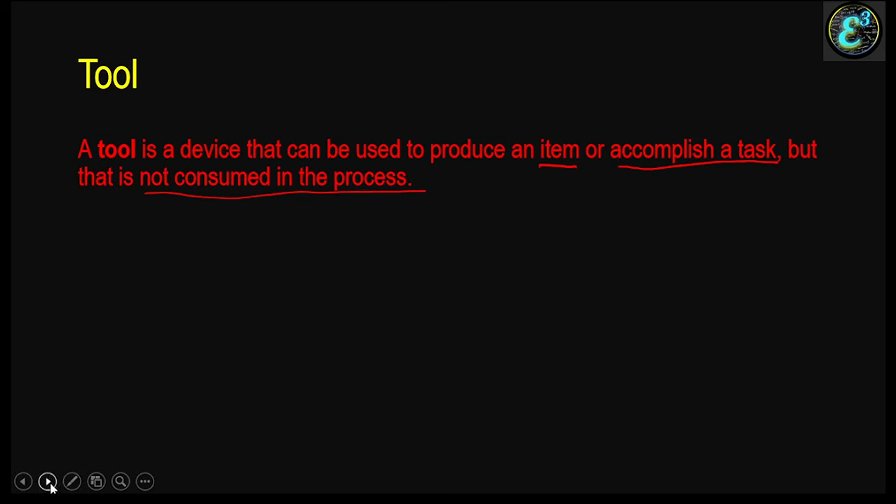Then we have types of electrical tools. So may apat po tayong type ng electrical tools. We have hand tools, tools manipulated by hands without using electrical energy. Example, puller, hacksaw, pull-push rule, pliers, hammer, and others. Meron naman tayo pong machine tools. These are tools manipulated by our hands, but they also utilize electrical energy in order to operate and to make the work easier.

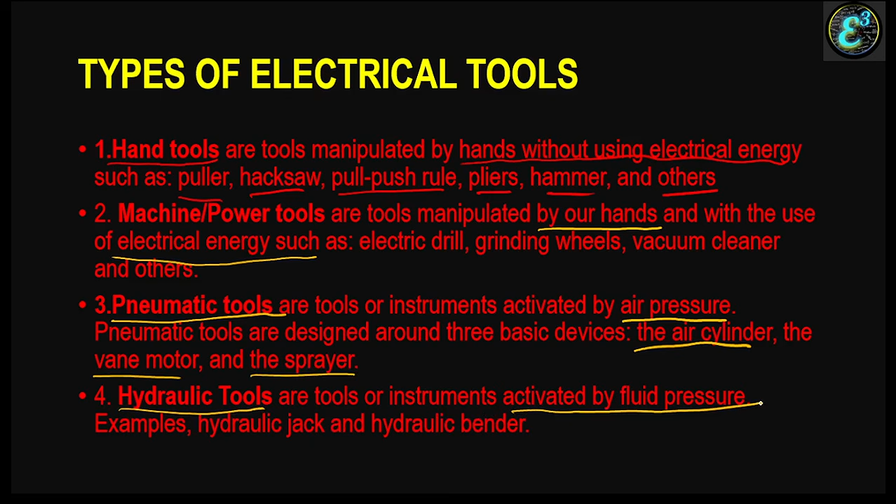Then you have also pneumatic tools. These are instruments activated by air pressure. The parts po ng pneumatic tools, we have the air cylinder, the vane motor, and the sprayer. Hydraulic tools naman, tools that are activated by fluid pressure. Example is a hydraulic jack and the hydraulic bender.

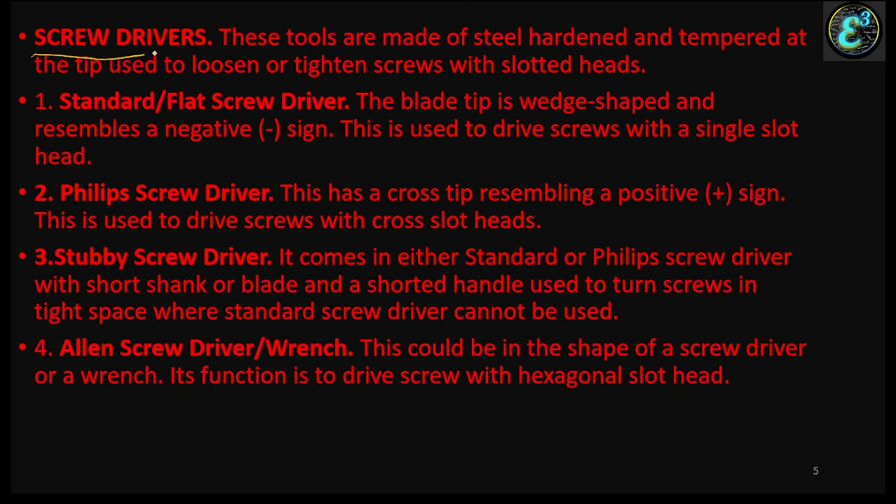Then common electrical tools. Unahin natin yung pinaka-common talaga, yung screwdrivers. These are tools made up of hardened and tempered steel, yung pinatigas po yung tip, usually used to loosen or tighten screws. We have four po na common sa electrical works. We have the standard or the flat screwdriver. Ang kanyang tip po is wedge shape and resembles a negative sign. It is used to drive screws with single slots. Then we have also Phillips screwdriver. Cross po kanyang tip, which resembles a positive sign, and used to drive screws with cross slot heads.

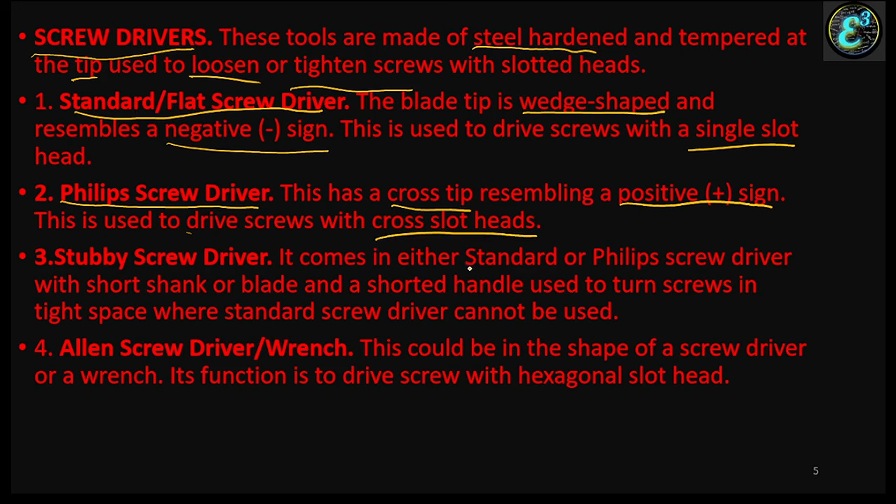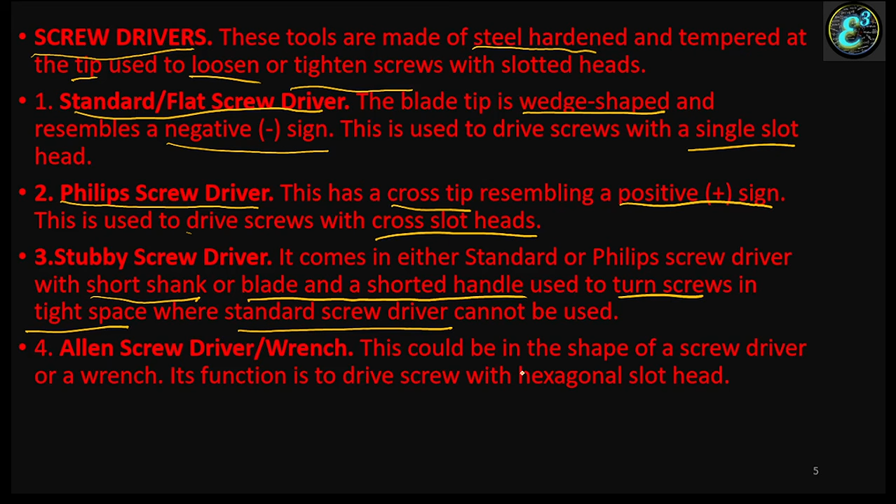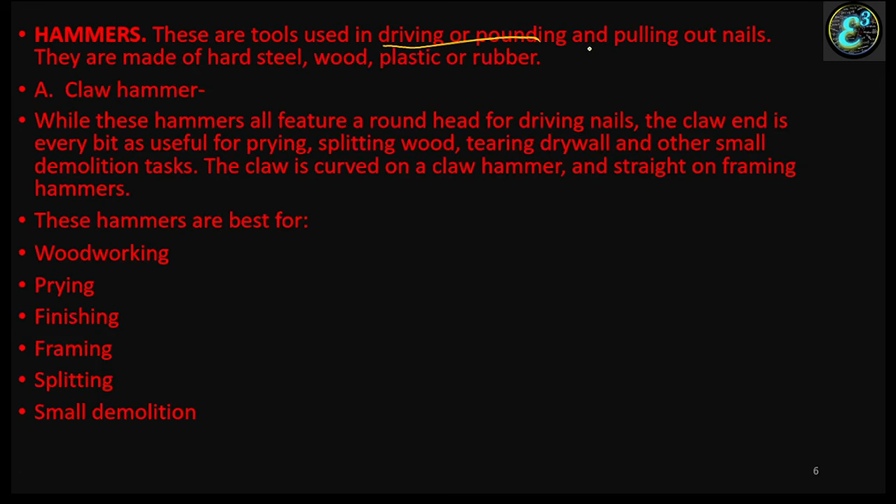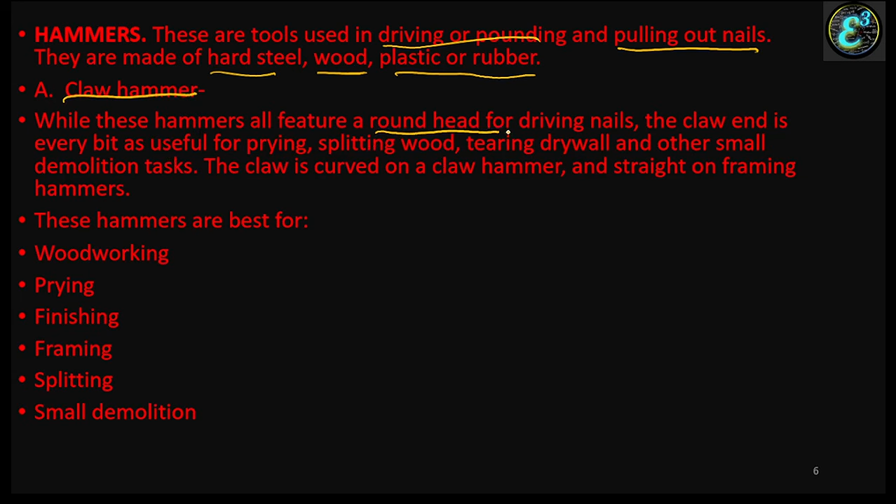Then we have hammers. Hammers are tools used for driving and pulling out nails, and they could be made with hard steel, wood, plastic, or rubber. The very common of that will be the claw hammer. It has a round head for driving nails and the claw end for prying, splitting wood, tearing drywall, or other demolition tasks, and also for pulling out nails. The claw is curved, and straight on the framing hammers. The purpose of this hammer: woodworking, prying, finishing, framing, splitting, and small demolition.

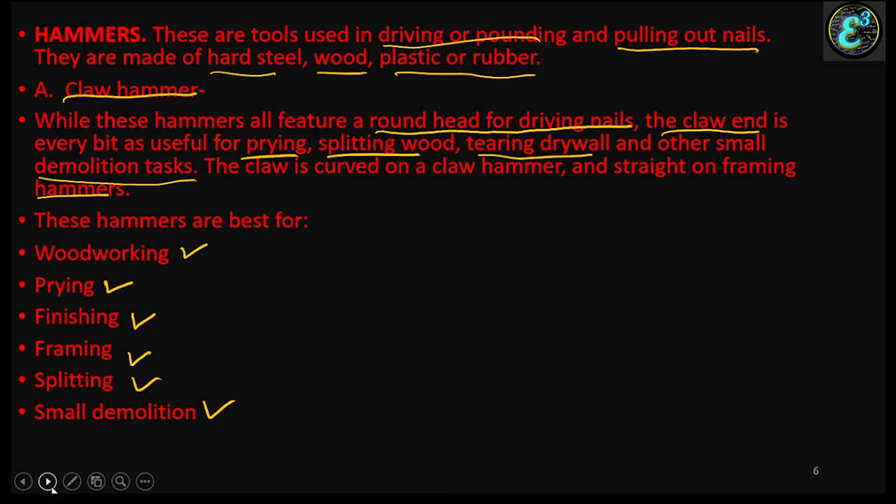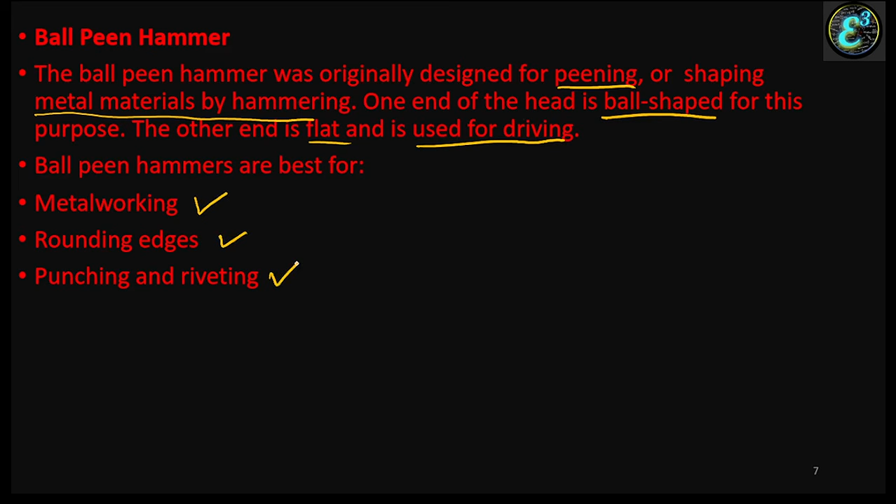Then we have ball peen hammer, which is designed for peening or shaping material by hammering. One of the ends is ball in shape, yun po ang kanyang purpose. Tapos the other end is flat and is commonly used for driving. This type of hammer is commonly used for metalworking, rounding edges, punching, and riveting works.

Then we have dead blow hammer. They are designed to strike surfaces with great force. The dead blow means they won't rebound. Ito po yung hammer na kapag may pinound kayo, hindi po siya magbabounce. These are usually used for automotive application, setting joints, and installing floorboards, in which ang extra vibration po is not advisable sa mga ganito na mga works.

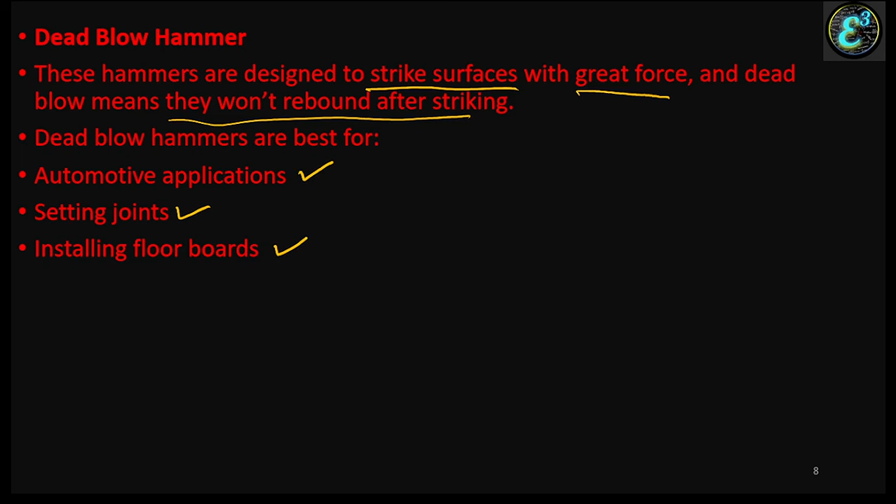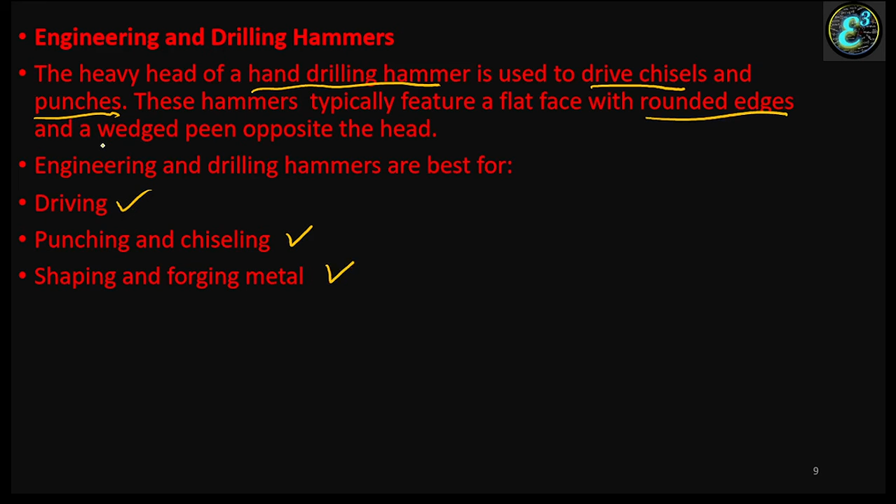Engineering and drilling hammers. The heavy head of a hand drilling hammer is used to drive chisels and punches. Ito po yung ginagamit kapag tayo po ay gagawa ng roughing in works, layouting po sa ating concrete, especially in cases na hindi po natin nalagyan ng tubo. They are used for driving, punching, chiseling, shaping, and forging metal. Rounded po ang kanyang edges, tapos sa kabila naman po is wedged peen.

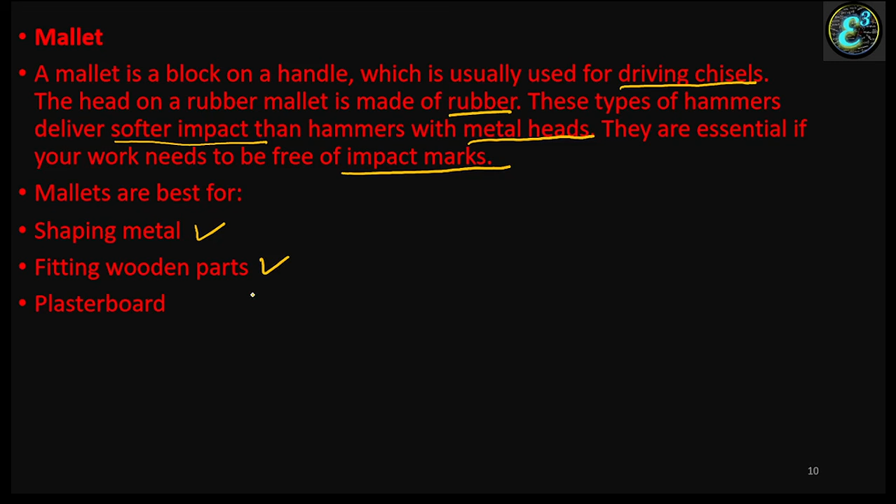Then mallet. A mallet is a block on a handle, usually used for driving chisels. The head on a rubber mallet is made of rubber. These types of hammer are used for softer impact than metal heads. This is usually used if yung trabaho nyo ay dapat walang impact marks. It is used for shaping metal, fitting wooden parts, or working with plasterboards.

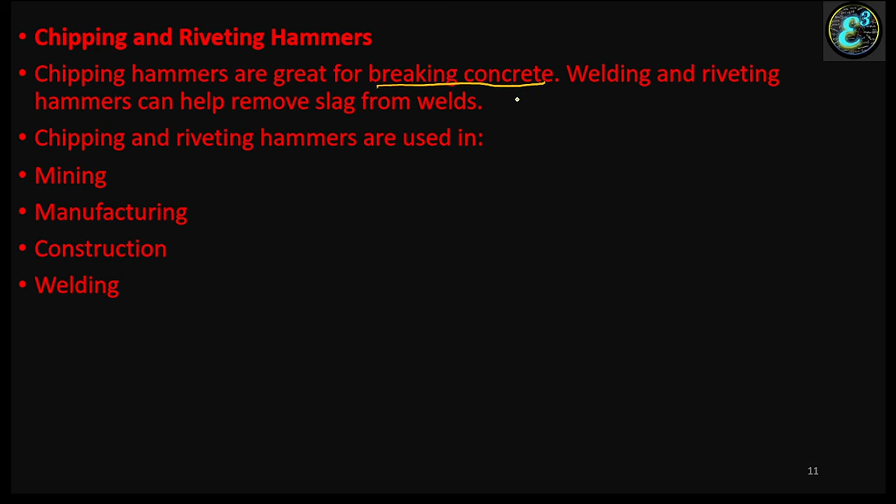Then you have chipping and riveting hammer. Usually used for breaking concrete, yung chipping hammer natin, and also for welding and riveting works, help in removing slag from welds. They're usually used in mining, manufacturing, construction, and welding. Okay.

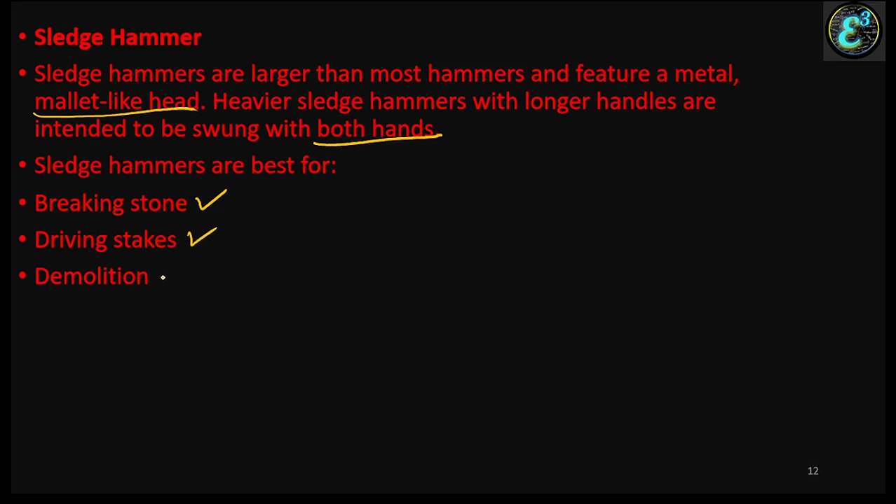Then we have sledgehammer. So ito yung isa sa pinaka-common hammer. Ang kanyang head is mallet-like. They are usually swung using both hands. Dalawang kamay po yung gagamitin using this hammer. They're usually used for breaking stone or for driving stakes, yung mga poste na kahoy or metal, and demolition jobs.

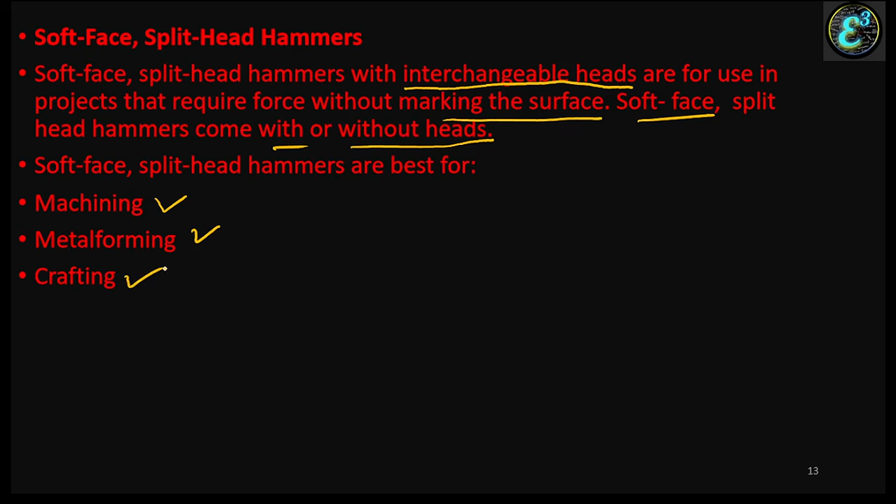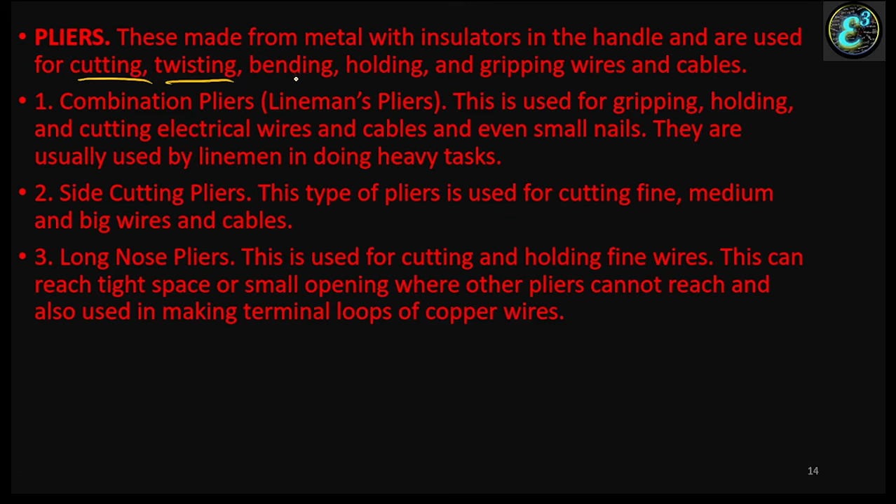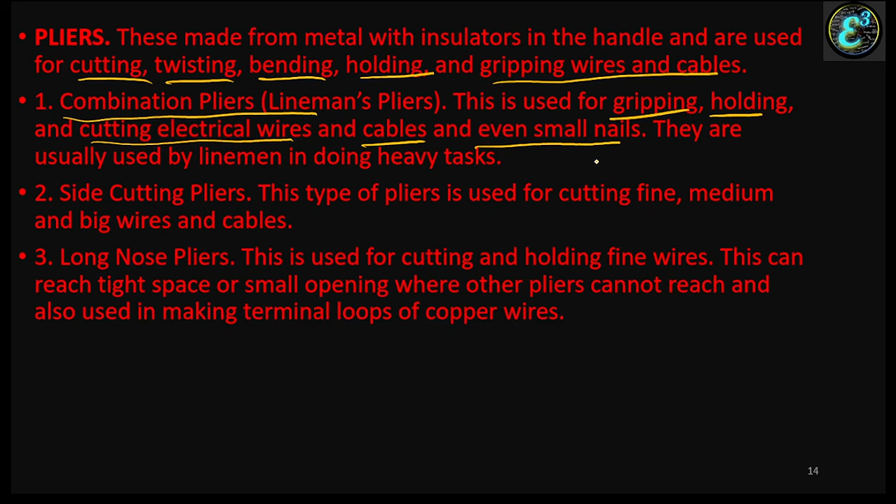Then pliers. So we are done with hammers, punta po tayo sa pliers. We have 3 common pliers that we are going to use, and pliers are used for cutting, twisting, bending, holding, and gripping wires and cables. Yung una po is combination pliers, also known as lineman's pliers, used for gripping, holding, cutting electrical wires, cables, and even small nails. They are used by linemen in doing heavy tasks.

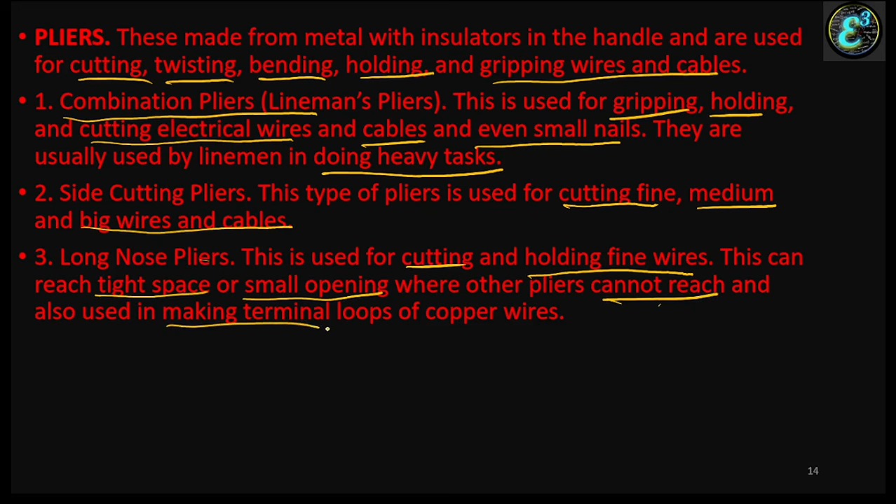Yung side cutting pliers naman, they are used for cutting fine, medium, and big wires and cables. Yung long nose pliers naman, they are used for cutting and holding fine wires, and they are especially used to reach tight spaces or small openings where other pliers cannot reach, and used in making terminal loops of copper wires.

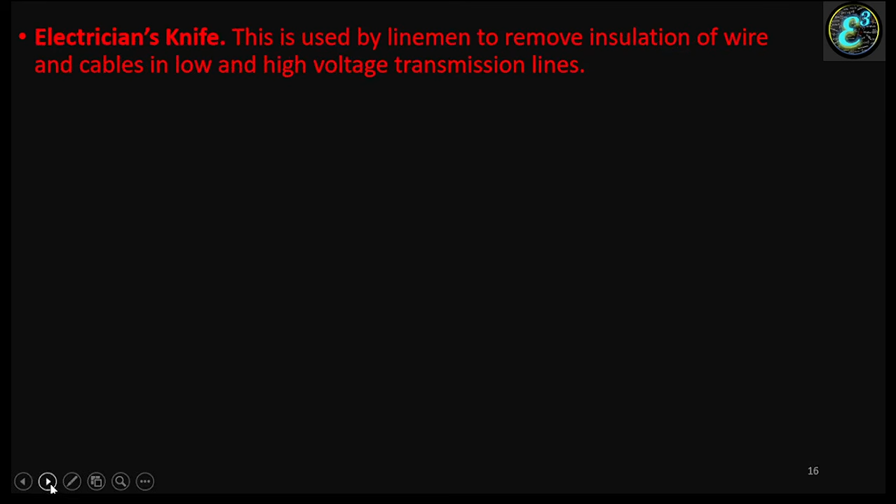Then you have the wire stripper. The usual use for this one is to remove the insulation of medium-sized wire, number 10 to number 16 AWG. Yun po ang kanyang usual na size na kaya niyang mag-remove ng insulation. Electrician's knife. This is commonly used by linemen to remove insulation of wire and cables in low and high voltage transmission lines.

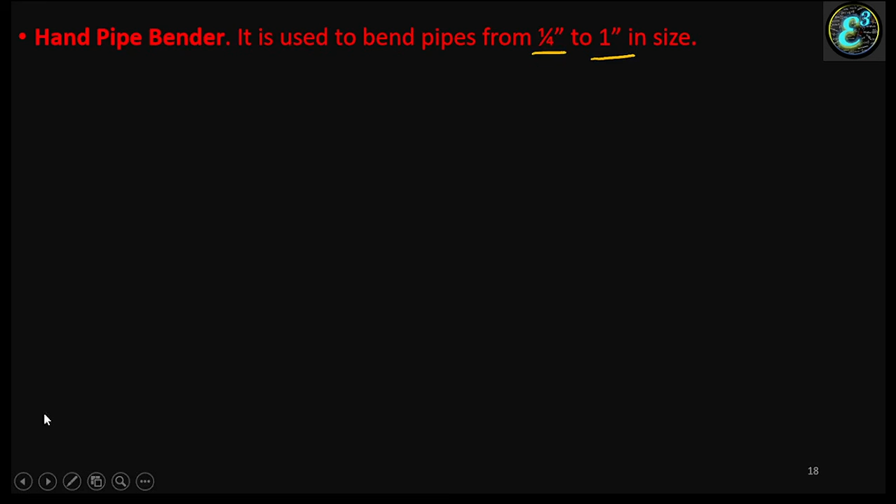Hacksaw. This tool is used to cut metal conduit and armored cable. Then hand pipe bender, used to bend pipes by hand from 1/4 inch to 1 inch in size. Kapag lumampas po ng 1 inch, usually we are going to use a hydraulic bender.

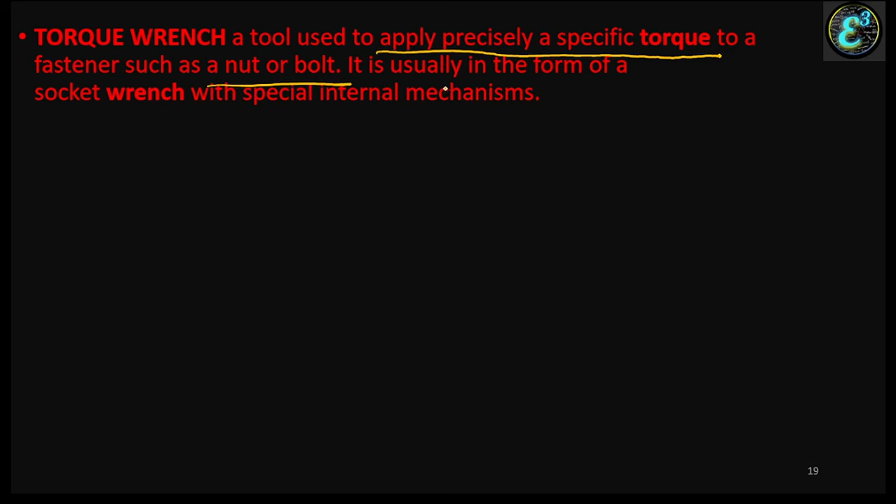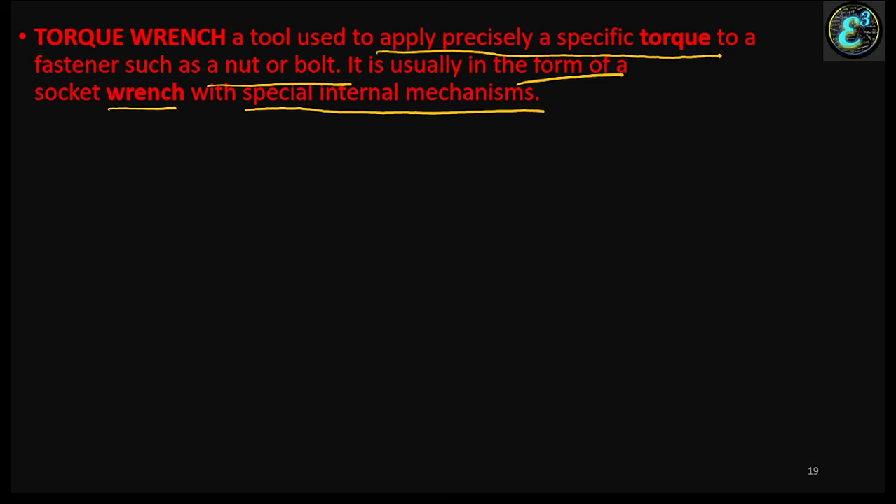Torque wrench is a tool used to apply precisely a specific torque to a fastener such as a nut or a bolt. It is usually in the form of a socket wrench with special internal mechanisms kung saan magse-set po tayo ng torque; if the required torque is achieved habang hinihigpitan natin yung bolt, it will not continue. This is done para hindi po malagyan ng sobrang torque yung ating bolt, to prevent it from breaking due to excessive torque.

Knockout punch, also known as chassis punch or panel punch, Greenlee punch, or Q-Max, is a hand tool used to punch holes through a sheet of metal, which is usually used kung magdadagdag po tayo ng butas sa ating mga boxes and panel boards.

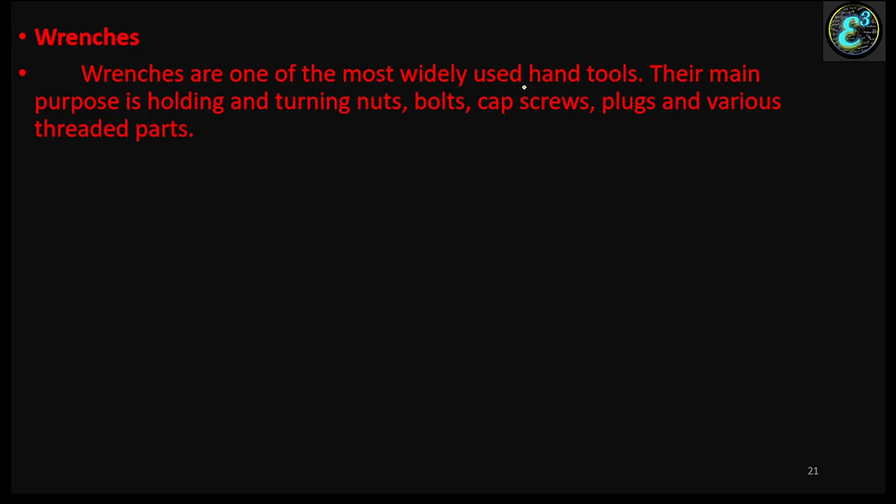Wrenches. Wrenches are one of the most widely used hand tools. Their main purpose is holding and turning nuts, bolts, cap screws, plugs, and various threaded parts. We have here the different types of wrenches. We have the open end, widely used, made with openings at a 15 degree angle, which permits rotation of hex nuts with a 30 degree swing.

Then the box wrench naman, they are made in long and short patterns with double offset, which is 15 degrees angle ang offset. 12-point hex and square openings are available. Yun po ang mga klase ng bolt na kaya nilang i-tighten or i-loosen. Then combination box and open wrench. Yung isang dulo niya is open, yung isa naman is box.

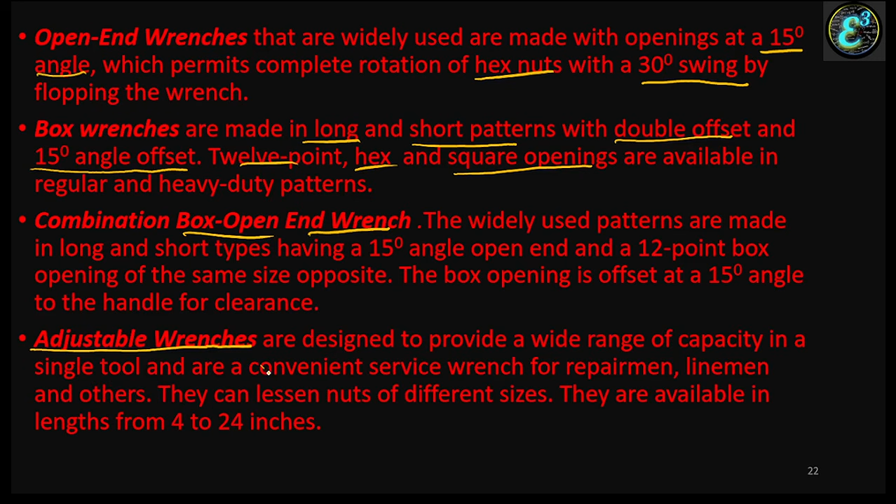Then adjustable wrench. This is a type of wrench na kung saan you just set it; if maliit yung bolt, you set it for that size of bolt, no need na maghanap pa ng box or open end wrench para doon sa bolt na yon. Their size is available from 4 to 24 inches.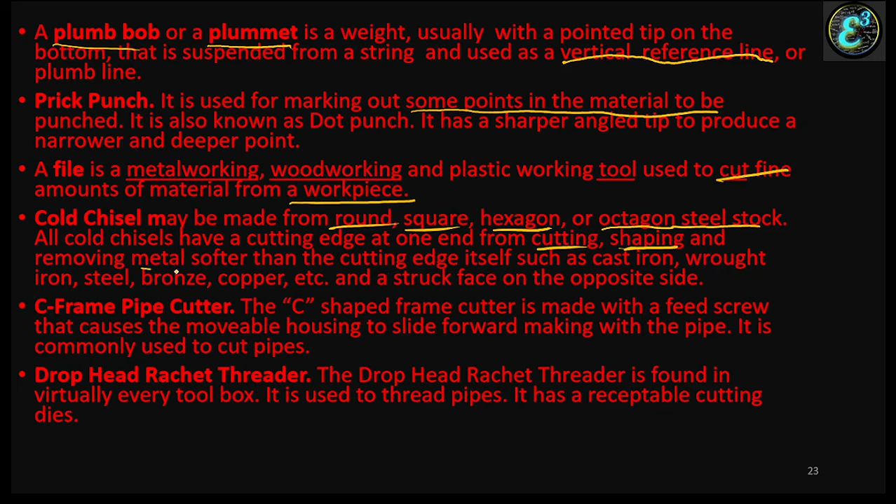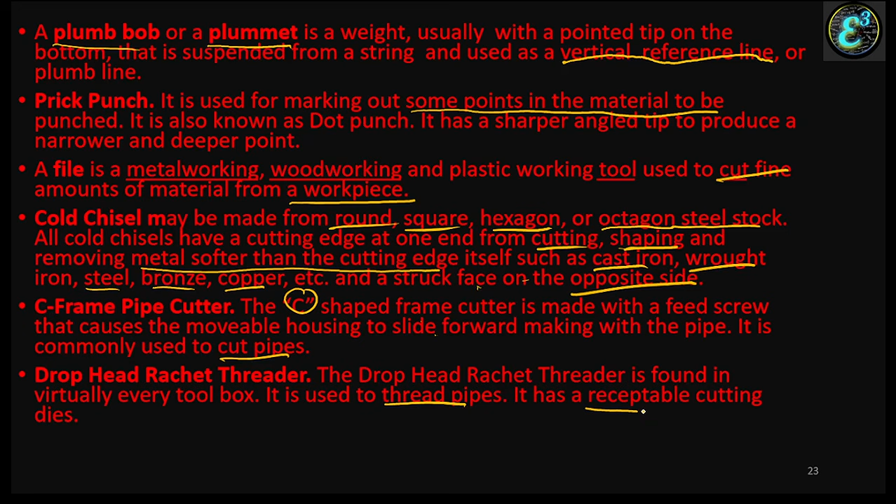We could also have octagon steel stock. These are usually used for cutting, shaping, and removing metal softer than the cutting edge itself. It could be made up of cast iron, wrought iron, steel, bronze, copper, with a struck face on the opposite side. C-frame pipe cutter has a C-shaped frame and is used to cut conduits and other round pipes. Drop head ratchet threader is used to thread pipes, having a receptacle or replaceable cutting die.

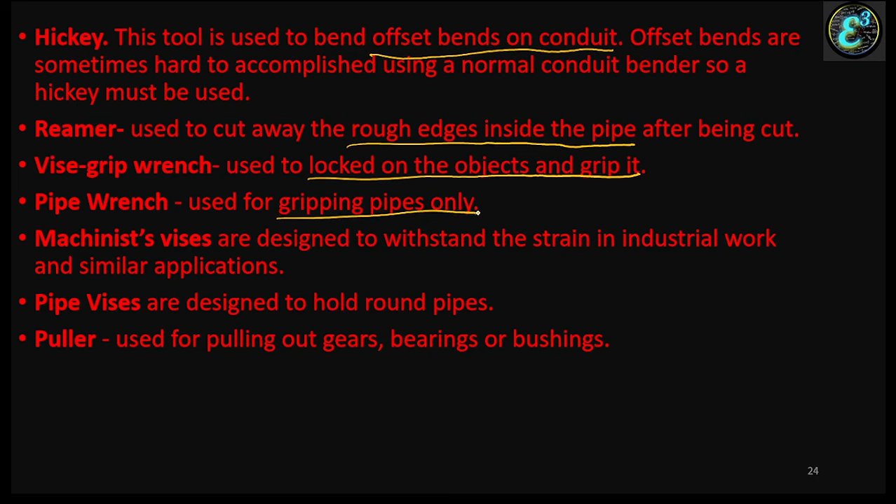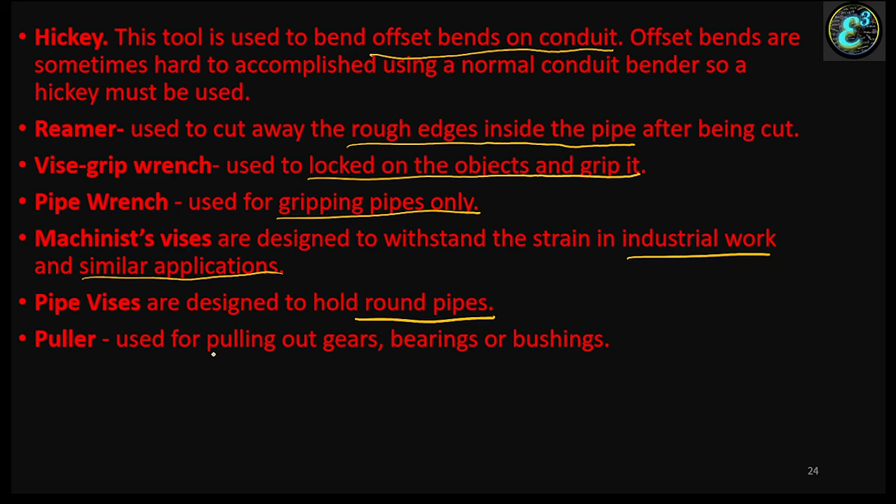Hickey is used to bend offset bends on conduit. Reamer is used to cut away rough edges inside the pipe after cutting. Vice grip wrench is used to lock and grip objects. Pipe wrench is for gripping pipes. Machinist vice are designed to withstand strain in industrial work and similar applications, perfect for metalworking. Pipe vice are designed to hold round pipes. Puller is used for pulling out gears, bearings, and bushings.

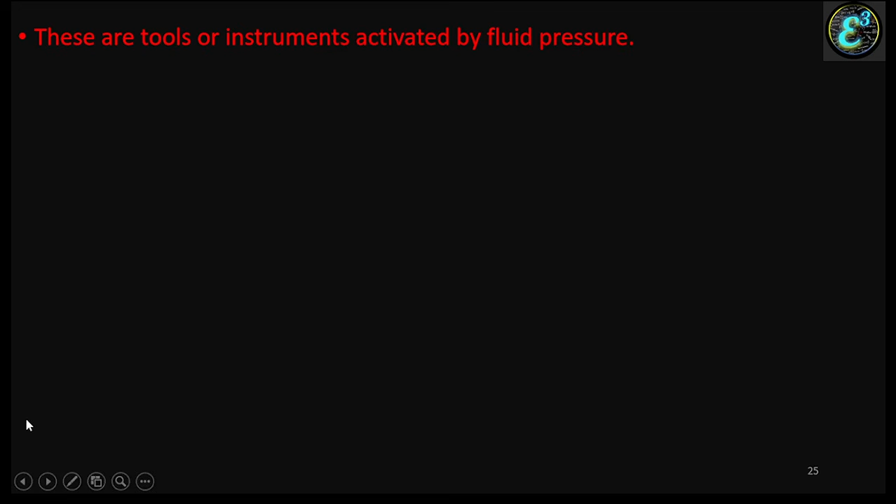These are tools or instruments activated by pressure. So let's try to review if you managed to catch up on what we discussed about hand tools. The correct answer for this one is hydraulic tools, using fluid pressure.

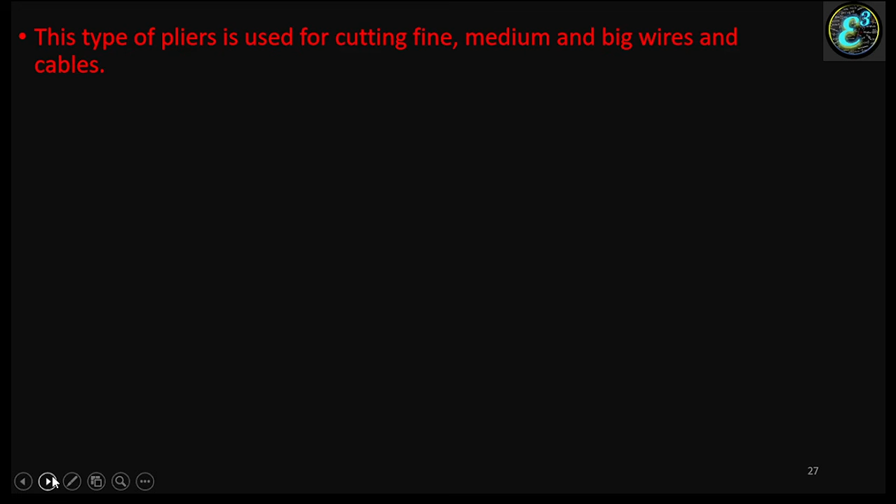It is used to cut away the rough edges inside the pipe after cutting, so that will be reamer. This type of pliers is used for cutting fine, medium, and big wires and cables. Big wires is the keyword here, and that will be side cutting pliers.

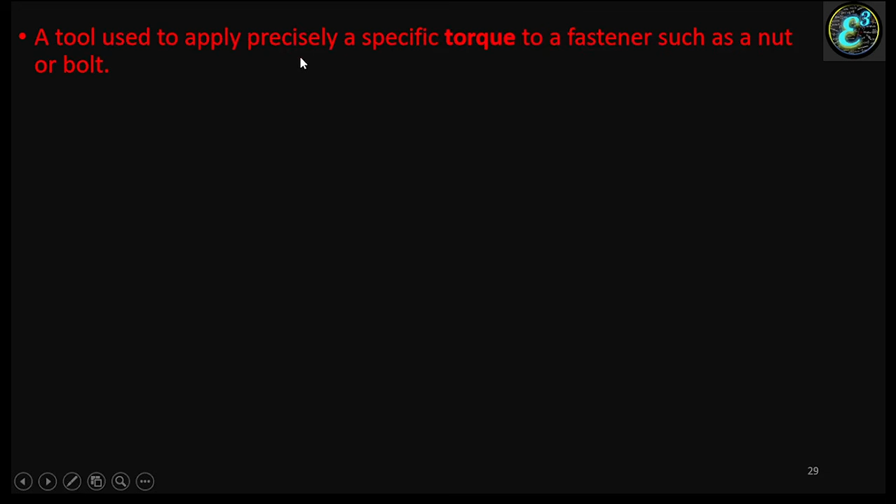This tool is used to bend offset bends. That's our keyword, so that will be Hickey. A tool used to apply precise specific torque - that's the keyword, torque - so that will be a torque wrench.

Now we go to common power tools, tools that utilize electrical energy. We have portable drill, a small cordless drill. Its chuck ranges from 1/4 inch to 3/8 inch, used for making holes on metal sheets and concrete walls, and also for driving screws.

Electrical drill has a power cord. It is used for the same purpose as our portable electric drill.

Grinding tool can be bench mounted or installed, but this tool could also be used by hand. They may either have a grinding wheel, a buff wheel, or two grinding wheels.

Jigsaw is a saw with fine teeth and narrow blade which can cut curves in wood. So if you're going to install round cuts and we don't have the right size bit, sometimes we use a hole bit to create a round cut on our ceiling, so we'll use a jigsaw.

Power hacksaw is a hacksaw that is operated by electricity. This is used for cutting metal.

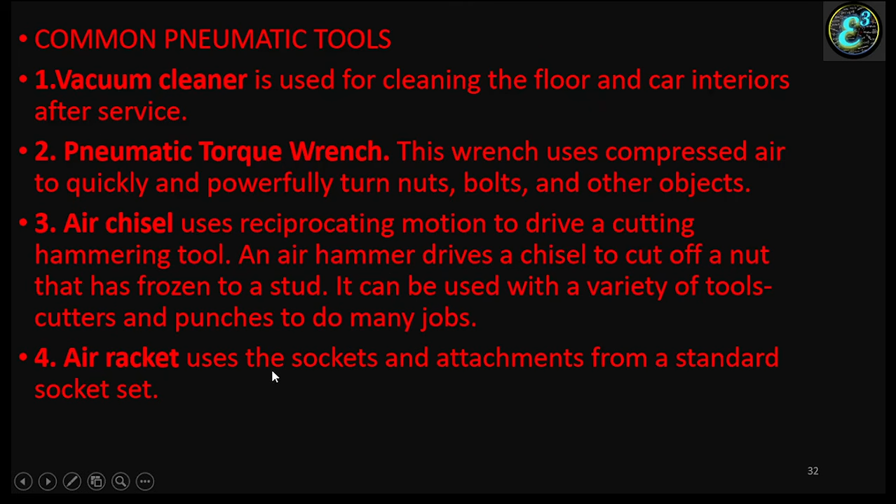Air chisel is the same as cold chisel, but also operated by pneumatic or air pressure. Then air ratchet uses the sockets and attachment for standard socket sets.

Then we have types of bits. We have drilling bits. Drilling involves using a drill bit to make a hole. Our drill needs a bit, called a drilling bit. A power hand drill is one of various tools to power the bit.

We have first twist bits. Twist drill bits are commonly used in electrical drills, and they have two types. We have the HSS, or high speed steel, for drilling metal, which could stand high temperature.

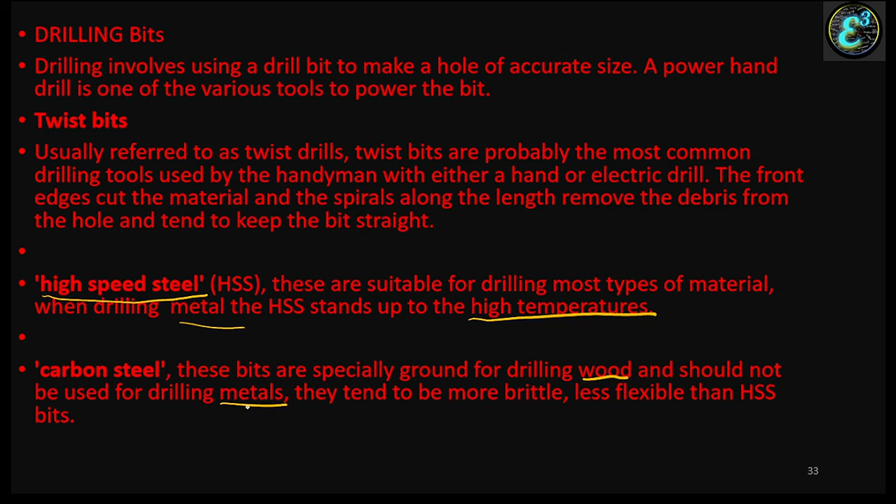Carbon steel drill bits are specially ground for drilling wood and should not be used for metal. So when it's wood, use carbon steel. When it's metal, use HSS or high speed steel.

They have masonry bits, used for masonry, concrete, brick, and stone. Spur point bits have a central point and two raised spurs, ideal for drilling holes for dowels, as the side walls are clean and parallel.

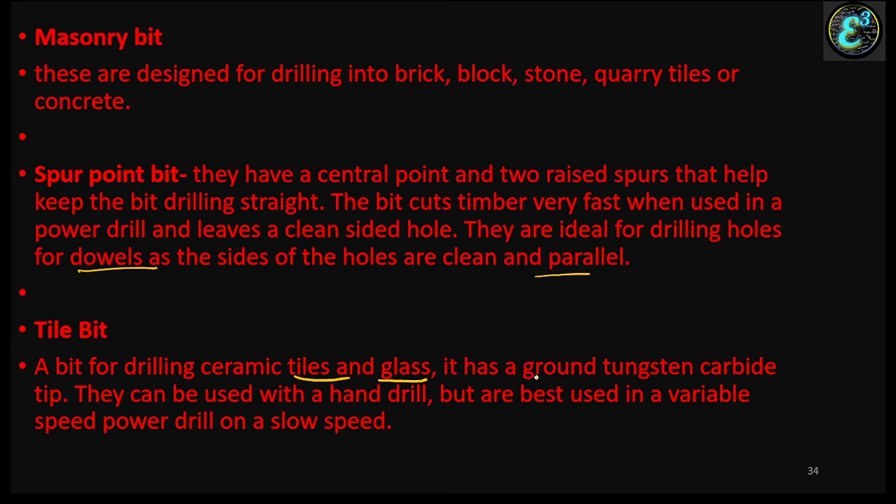Tile bit is for ceramic and glass. Its tip is ground from tungsten carbide. Then flat wood bit is intended for cutaways on timber or wood.

This is for cutting large fixed diameter holes in wood or plastic. Forstner bit is for forming holes with flat bottoms, such as for kitchen cupboards and hinges.

Kitchen cupboard hinges. Wood auger bit is for drilling large deep holes in wood or thick man-made board. When the material is thick man-made board or wood, use a wood auger bit.

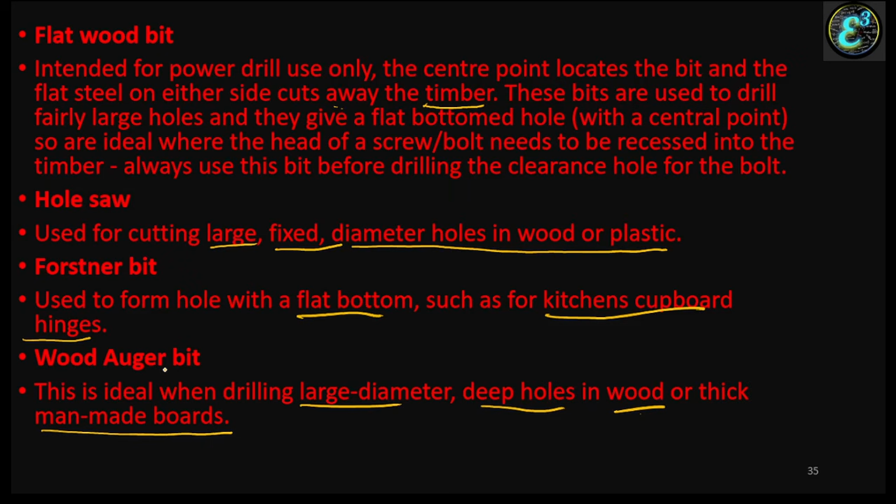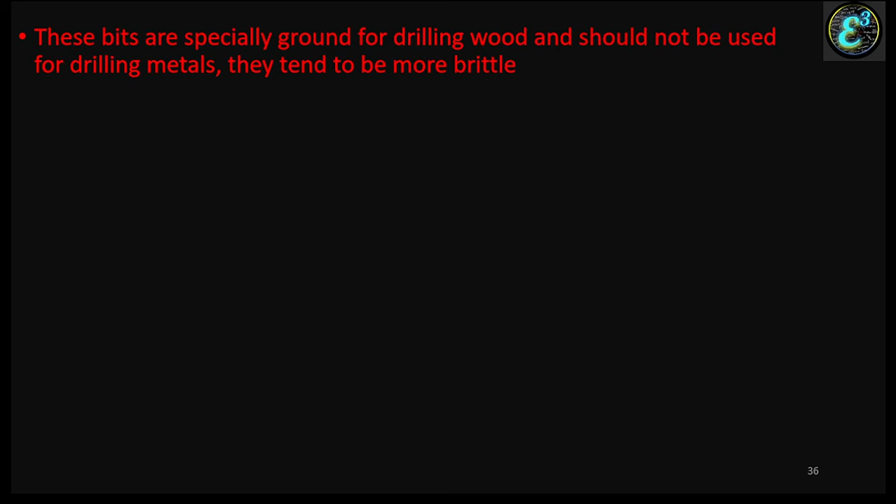Kapag manipis lang, for example ang ceiling, gagamit tayo ng hole saw. Okay, review: these bits are especially ground for drilling wood and should not be used for drilling metals, as they tend to be more brittle. This is called a carbon steel bit. They are ideal for drilling holes for dowels since the sides of the holes are clean and parallel. This will be a spur point bit. Ito na may answer na Forstner, for kitchen cupboard hinges.

Then we go to measuring tools and equipment. Ito yung mga ginagamit natin - they are sensitive and delicate, so extra care is necessary in handling them. They are usually used to measure lengths, the current, the voltages, the resistance, wattage, and other important elements in electrical works.

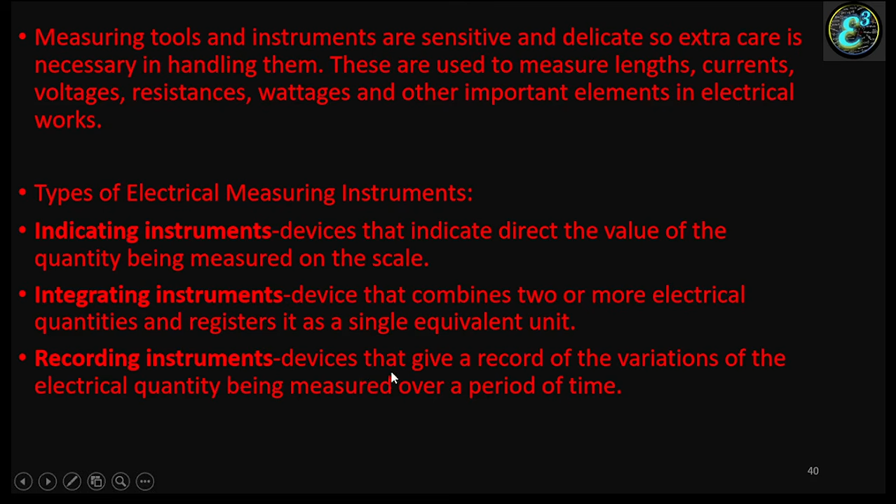Type of electrical instruments: first, indicating instruments - devices that indicate directly the value of quantity being measured, binibigay agad kung ano yung value ng ating measurement. Integrating - devices that combine two or more electrical quantities and register a single equivalent unit, example is yung ating mga metro, yung kilowatt hour meter. Then recording instrument, devices that give record of variations of the electrical quantity being measured over a period of time. So the common is test light.

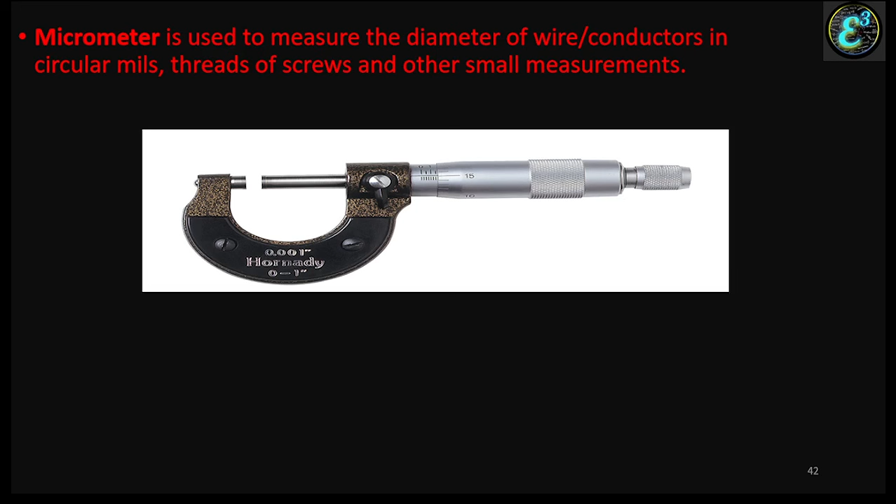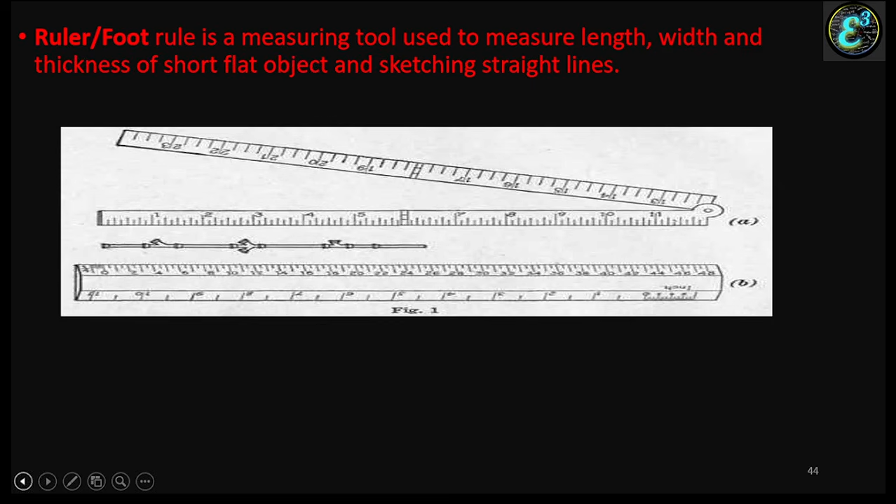The ruler or foot rule is usually used to create straight sketch lines. Push-pull rule is usually used to measure length of an object or distance. We have centimeter and inches ang kanyang ma-measure.

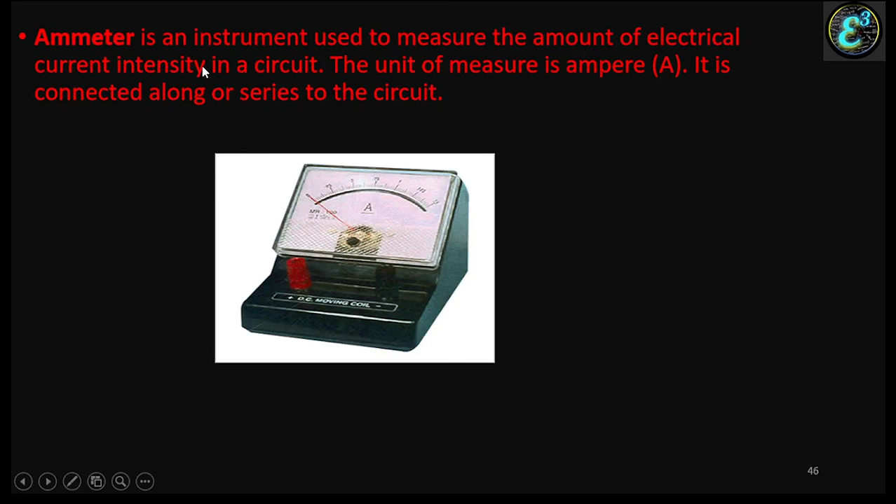Ammeter is usually used to measure the current in a circuit. Ang unit ng current, as we know, is ampere, and this instrument is connected in series along the circuit. So ito yung kanyang keyword, series.

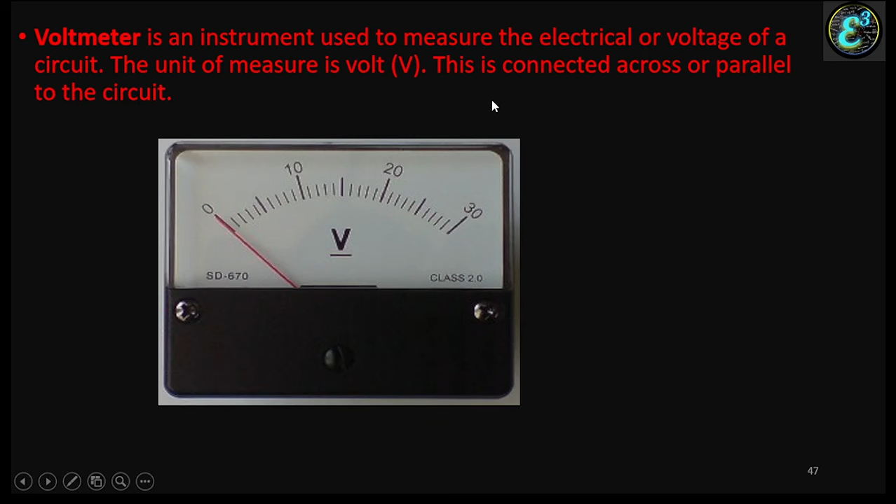Voltmeter is used to measure the electrical voltage of a circuit, and it is connected across, or parallel to, the circuit. Then clamp-on meter, also known as the tong tester, is used to measure current ng conductor.

It is clamped or hung on one of the conductors na gusto ninyong i-measure yung kanyang current. Kunyari, single phase, dalawang wire yan. Isang conductor lang po yung ika-clamp, hindi po kasama yung isa, kasi kapag kasama yung isa, magsi-zero po yung reading ninyo.

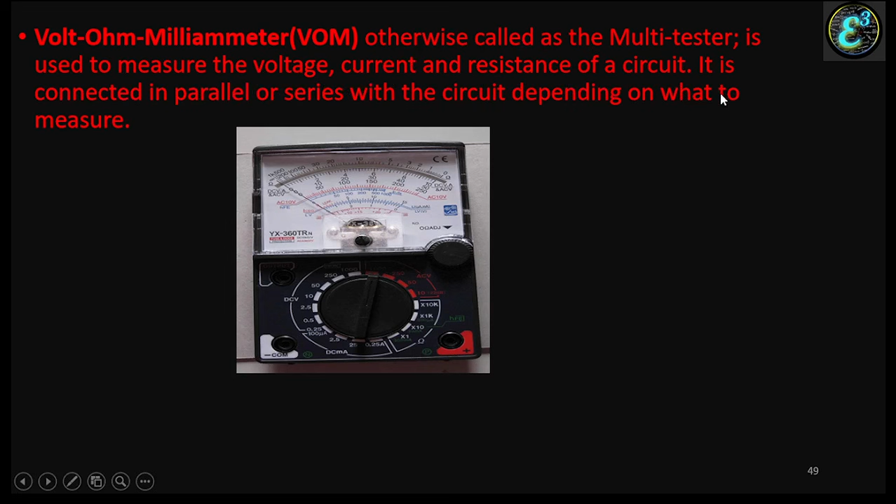Then volt ohm milliammeter, otherwise called multi-tester, is used to measure the voltage, current, and resistance of a circuit. So it could be connected series or parallel on the circuit depending kung ano yung measure ninyo.

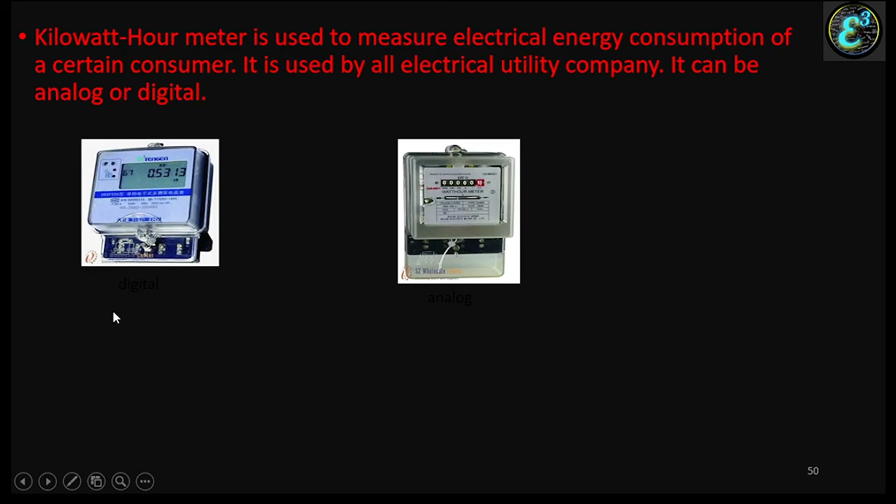Then kilowatt-hour meter is used to measure electrical energy consumption of a certain consumer. It is used by all electrical companies, and it could be analog or digital.

These are also other measuring instruments. We have calorimeter - from the word calorie, heat yung mini-measure niyan. Dynamometer, so that measures rotating dynamo, mechanical output of our motor. Frequency meter will measure frequency. Galvanometer will measure small voltages or current.

Hydrometer - that is specific gravity ng ating battery, which is very important to know the specific gravity of our battery para malaman natin if our electrolyte has already been drained. Inductometer measures inductance. Megger, also known as megaohmmeter, is for insulation resistance. Ohmmeter measures resistance. Oscilloscope shows the waveform of our AC current.

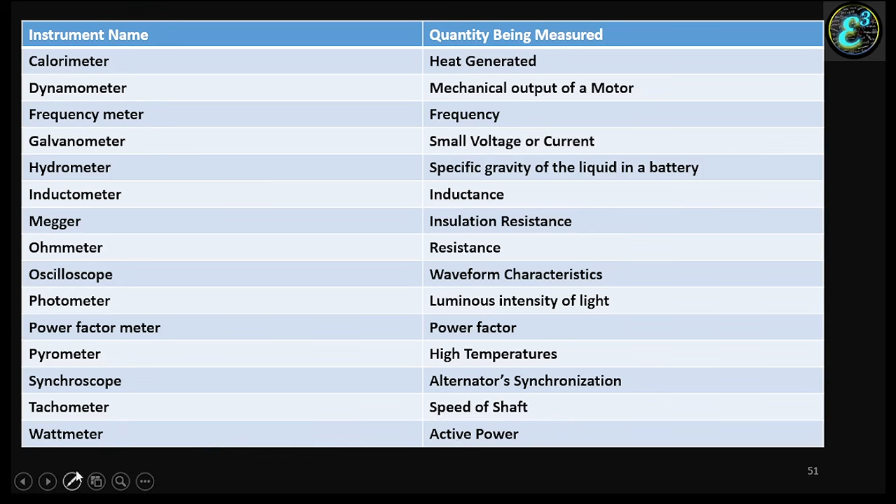Photometer is for the luminous intensity of light. Power factor meter is for power factor. Pyrometer - pyro meaning fire, so it's for high temperature. Synchroscope is for the synchronization of our alternators. Tachometer is for speed of the shaft, yung speed ng pag-rotate ng ating motor. And wattmeter is for active power.

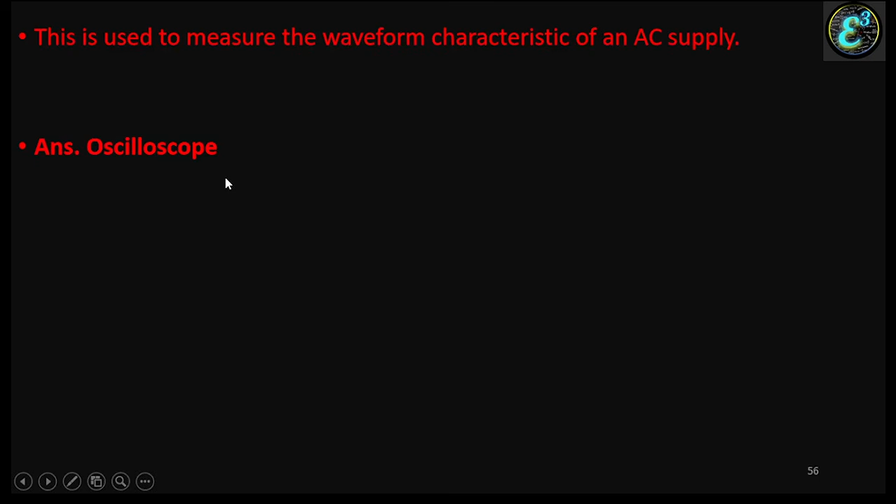Okay, next, waveform characteristics. That will be oscilloscope, no? So the keyword there is waveform characteristics.